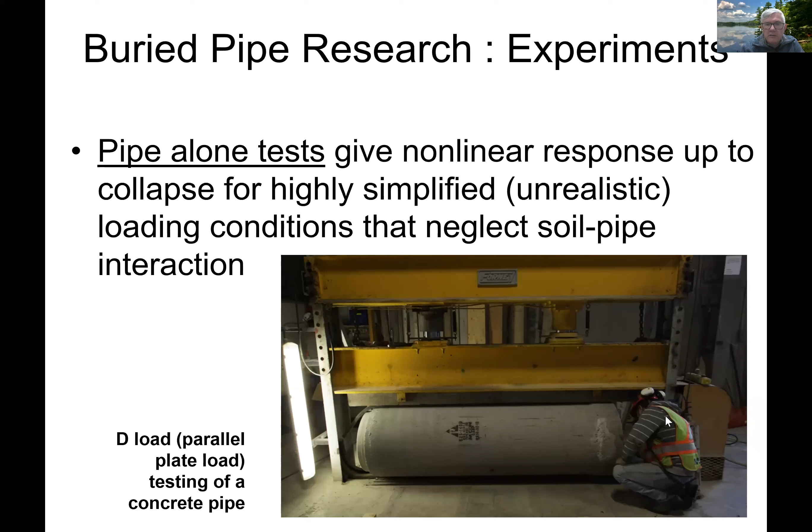Another alternative is to do field testing, which can be very useful because we have access to the complete system being studied - we're able to do loading under vehicles and so on. There are certain things we can get in the field that we can't get other ways, but it can only be for very specific, quite complex site conditions. Often we don't actually know the site conditions because we haven't controlled the soil placement, and the soil part of the system is very important. Most importantly, we normally can't load buried structures up to their strength limits in the field because we're normally testing structures that are in service, and nobody likes us breaking their stuff.

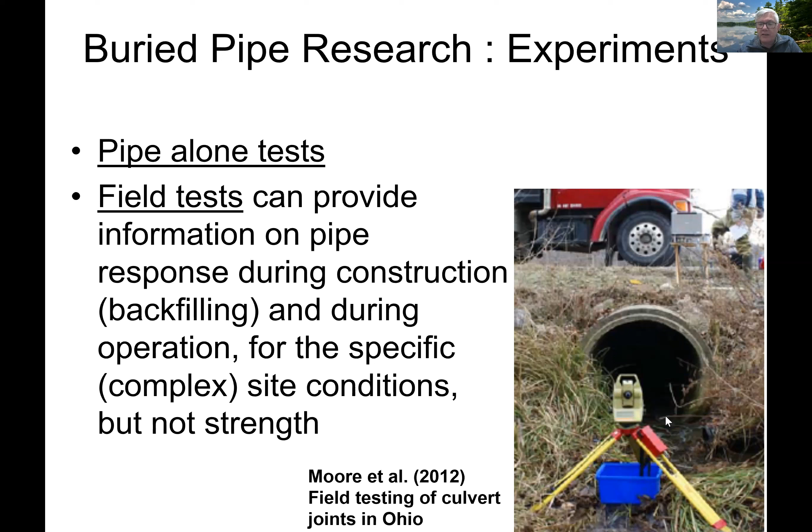Another approach is to do small-scale experiments. For example, I've had some projects using the centrifuge at C-CORE in St. John's, Newfoundland, and centrifuge tests can be performed much faster, and they're very good at modelling nonlinear soil behaviour, but you can't really capture the nonlinear behaviour of the pipe.

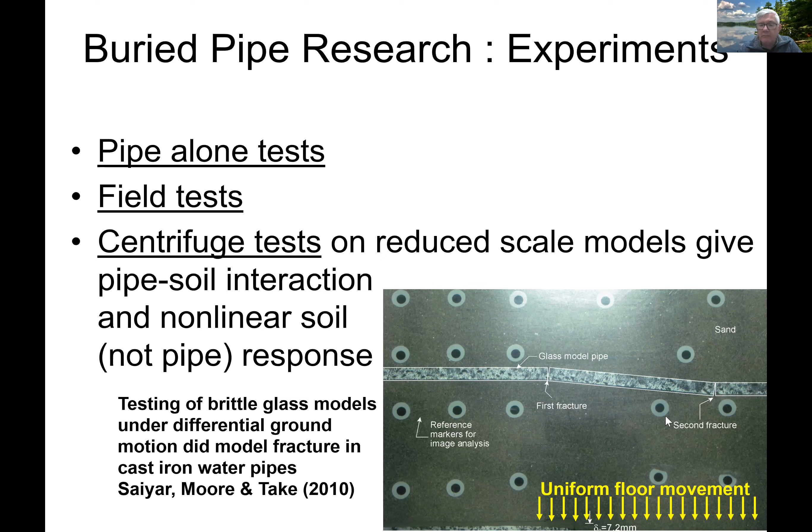And so that's a tool that I do use, but I don't use it that often because a lot of the problems that we're dealing with is the pipe strength, joint leakage, and things like that, which you can't model in a centrifuge. And so the alternative then is to do prototype scale tests, or what I'm calling large scale tests in this presentation, so that we've got both the pipe and the soil.

And because we're doing it in the laboratory, we're controlling the backfill placement. We're getting good understanding of the actual system that we're testing because we're placing the soil ourselves, using normal construction methods, but controlling that and monitoring the way we choose. And because it's in the laboratory, we've got access to equipment like actuators and so on, and we can test up to strength limits.

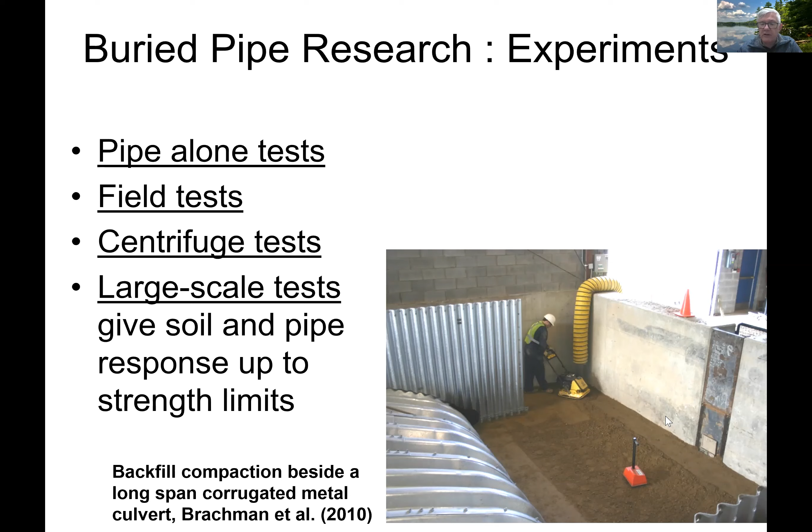So, as I mentioned, the idea of this presentation is to introduce the large-scale facilities at Queen's.

I'm going to illustrate the research by touching briefly on a project on pipe joints, a project looking at erosion into leaking pipes, like corroded corrugated steel pipes that are leaking, so ingress of groundwater produces soil erosion. And we'll also look at the effects of differential ground settlement on joint leakage.

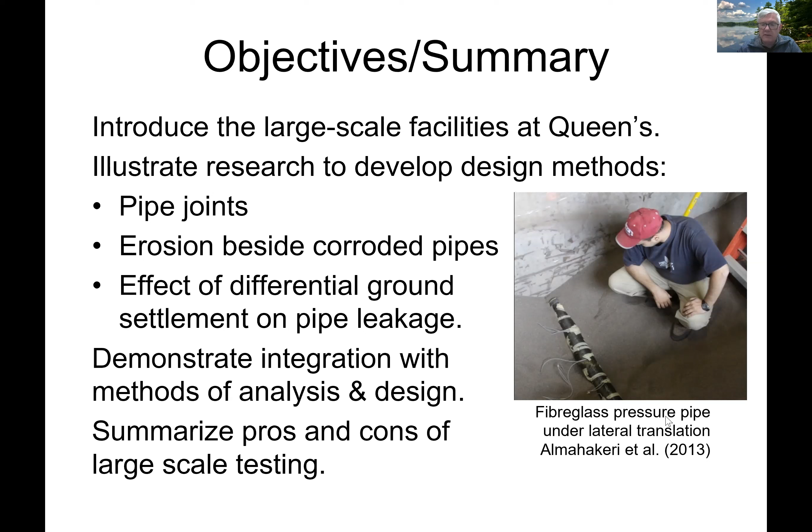I think I'm going to show you how we can integrate that type of experiment with development of methods of analysis and design methods. And I'm going to finish up the talk by summarizing some of the pros and cons of large-scale testing.

So this shot here shows an overview of the test facility at Queen's, the geoengineering lab, which is primarily a buried pipe testing laboratory. This is showing the western part of the laboratory, which is primarily composed of a pit, 16 meters long, 8 meters wide, 3 meters deep.

At one end, we've got a door, which means we can bring in vehicles and load the infrastructure that's buried there under, say, a tandem axle dump truck or something like that. I think I've got a photograph showing that in a moment.

The other half of the pit is specially set up to do trenchless construction. And the particular setup here was a static pipe bursting experiment that was done by one of my former students, Jennifer Cholewa.

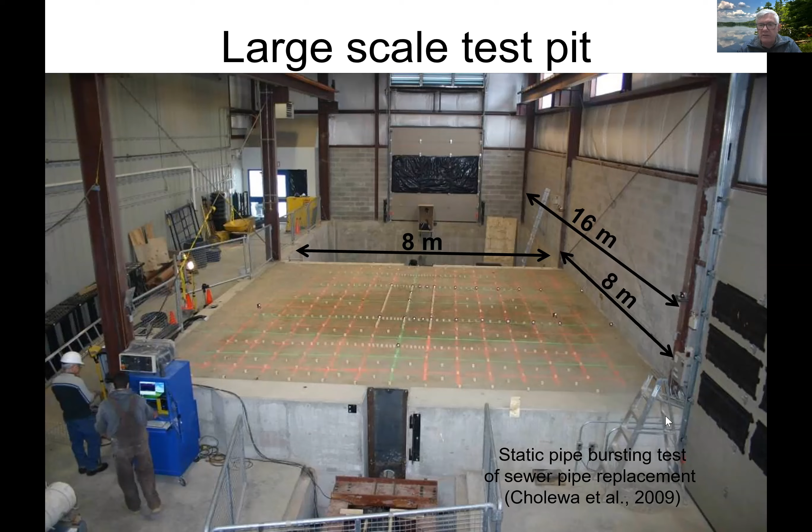So the facility allows us to test culverts up to spans of about 10 meters. We couldn't do much more than that. And here's a former student, Andrea, and the corrugated steel culvert that she tested.

But we also have the pit, as you saw in a previous photograph, divided into two with a removable retaining wall because it's quite expensive to do very big experiments. So normally we're doing tests in the 8 meter by 8 meter plan configuration.

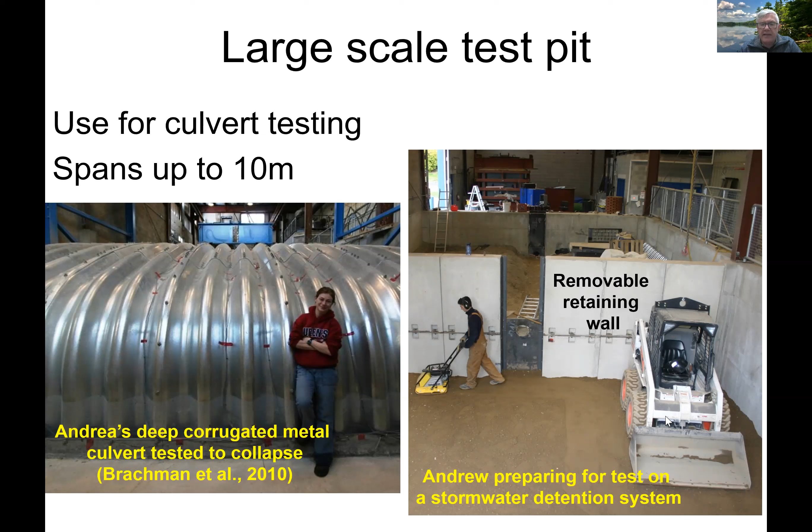This particular slide shows how we can test under the dump truck, as I mentioned, and a typical unfactored tandem axle load, full service load, would be about 24 tons.

But we also have a reaction frame over the test pit, this blue frame, and we can hang our 200-ton actuator into that and apply forces of up to 200 tons onto a set of beams which represent the axles of the truck. So we can test, say, a wheel pair, like one of the steel plates at the end of those beams, a single axle or a tandem axle. And when you make those two different tests and compare them, the difference is about 2 or 3% in the measured behavior, so the axle beams do a pretty good job of representing the truck.

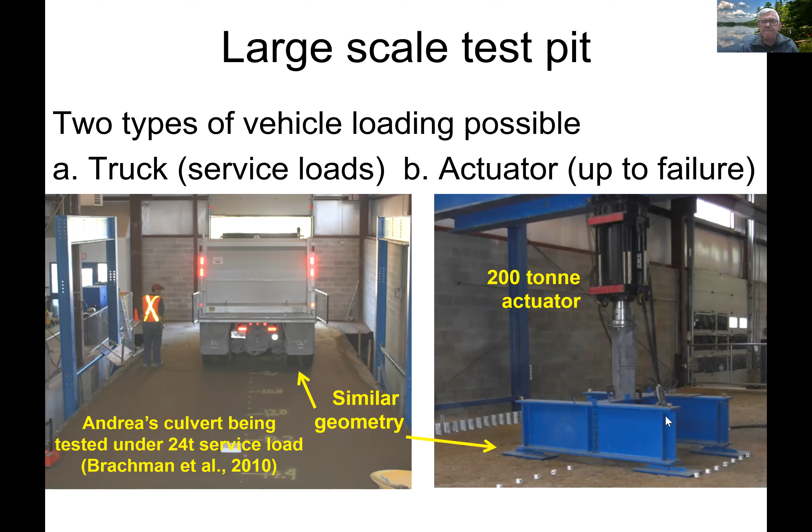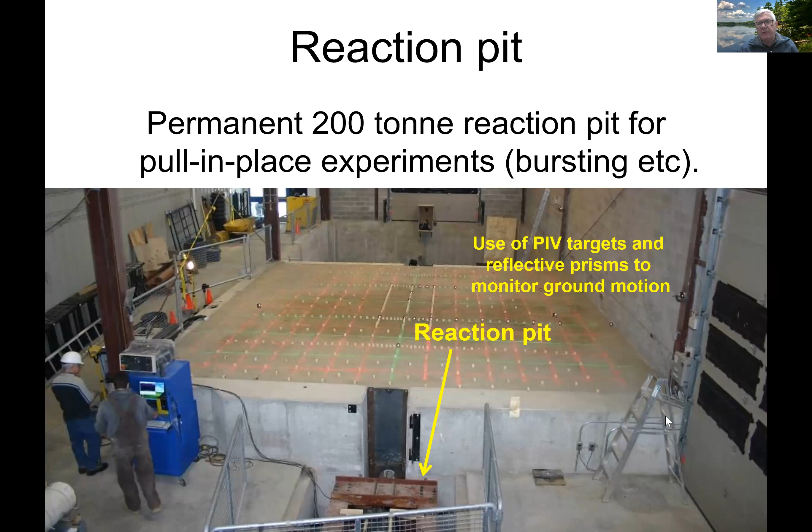The configuration for trenchless construction that I'm showing here is made possible because we have a reaction pit on the eastern end of the large pit. That reaction pit is designed to have a 200-ton reaction capacity, either pushing or pulling, if we want to do those sorts of trenchless experiments.

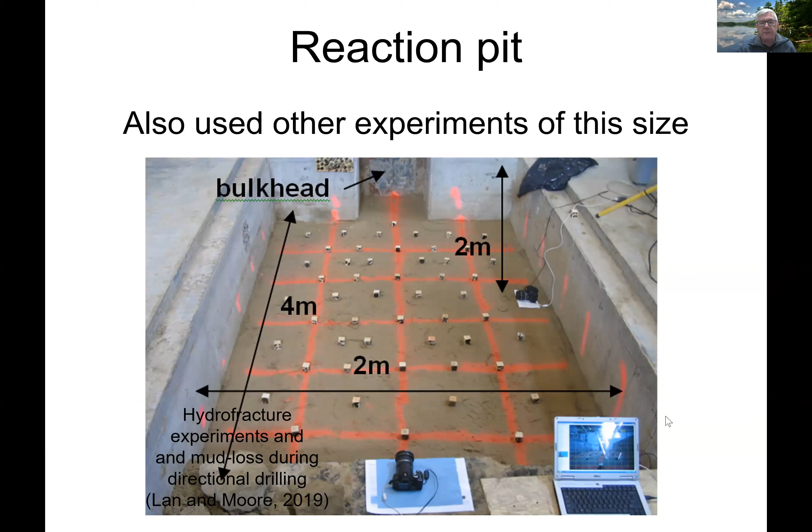We also use that reaction pit for experiments. We've done hundreds of experiments in the lab since it was commissioned in 2006, but probably scores of experiments actually in this small reaction pit - it's 4 meters by 2 meters by 2 meters. For example, a really nice project looking at hydrofracture during directional drilling, loss of mud from a borehole up to the ground surface through the sand.

We also have 2 other facilities. One of them is the split box, which is essentially a normal fault simulator. The box is just under 8 meters long. Half of the box's floor is supported by 4 screw jacks, and the other half is compacted fill sitting on the floor of the pit. We bury pipes in a zone that's 1.8 meters by 1.8 meters in depth and width, and then subject that to a normal fault by lowering those screw jacks.

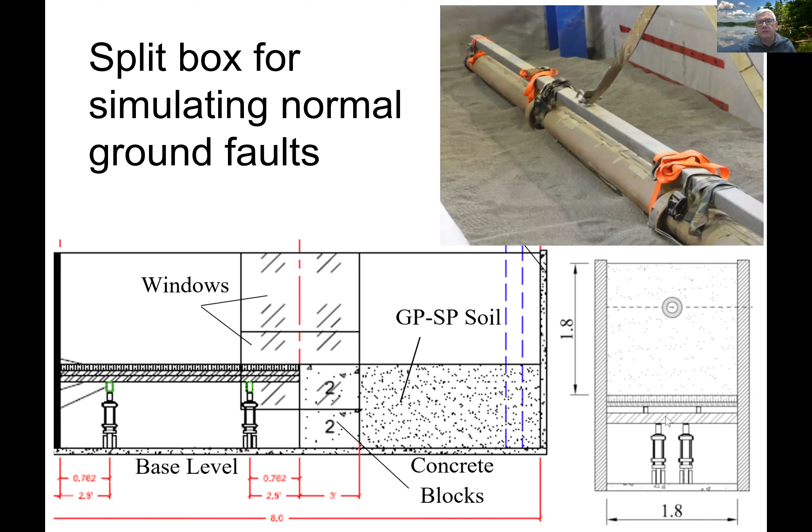I'll be illustrating my talk briefly with discussions about one of those specific tests.

Finally, I wanted to introduce you to the deep burial simulator, the newest of the facilities. It's a pit 4.6 meters deep, 3 meters wide, and 5 meters long, built for 2 purposes. One is to simulate burial up to about 18 meters of cover, using 2 250-ton actuators bearing onto a stiff steel grillage to apply an equivalent overburden pressure. This pit is also sealed, like a bathtub, so we can do saturated ground testing. I'll be talking in a couple of minutes about some erosion experiments we've performed.

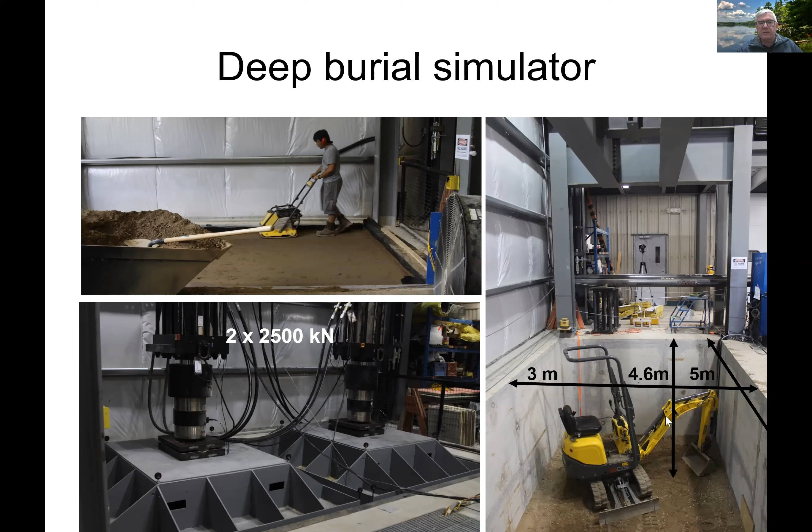So the first of them, I wanted to talk a little bit about the surface loading facility at the west end of the laboratory.

This is a project performed by a former doctoral student, David Becerril Garcia, who was looking at the behavior of joints in culverts. It's a project for the US highway departments about a decade ago, and it involved testing concrete, corrugated steel, and polyethylene pipes with different sorts of joints under surface loads, understanding the impact of truck loads on the demands on the joint, the rotations and the shears.

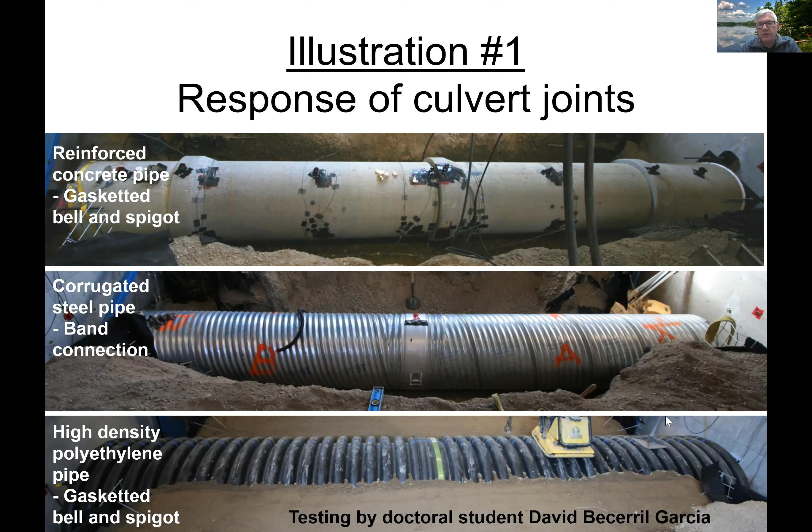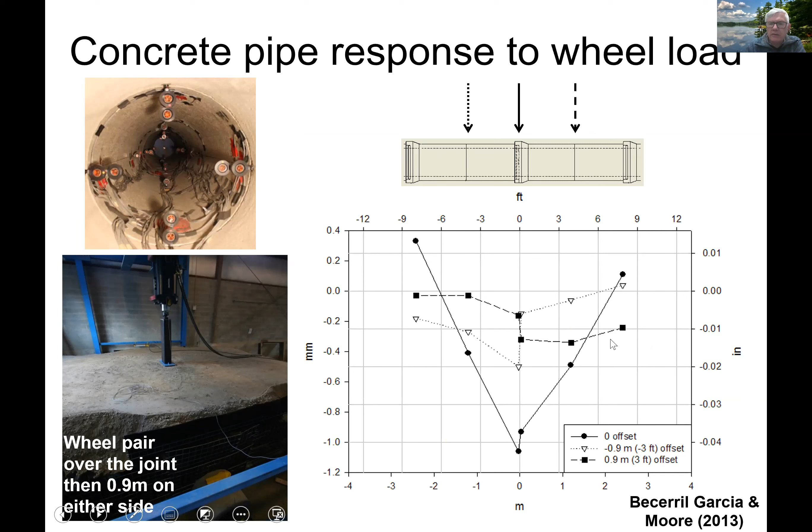And then, of course, if we put the load to the right, we get a shear response that's a mirror image of that. This allowed us to establish the kinematics, obtain experimental data, and develop design models proposed for incorporation into... I don't know why it's not moving forward. There we go.

But also, consider that earth loads produce no joint response if the soil support is uniform. But if, for example, we've got softer soil under one pipe and stiffer soil under the other, that difference in soil stiffness will also produce shear and rotation. So we developed a set of design equations for consideration by AASHTO for inclusion in the LRFD bridge design specifications.

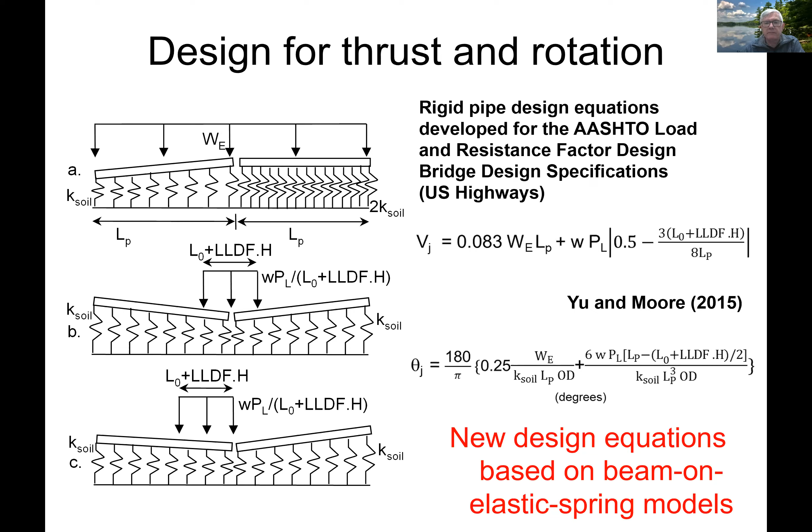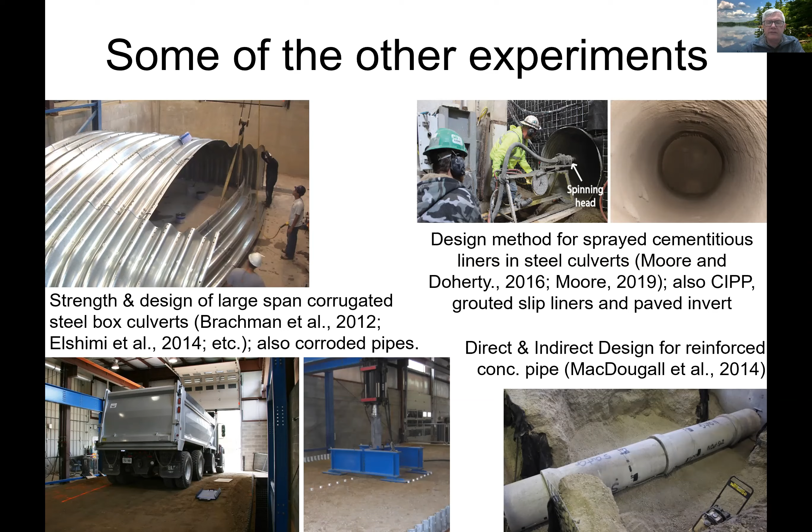The second project I wanted to touch on is this project in the deep burial pit, where we've looked at soil water ingress through corrosion perforations.

The guy fortunately was not killed. Passers-by were able to rescue him from the hole. I think he was not entirely pleased about his experience, but he wasn't injured.

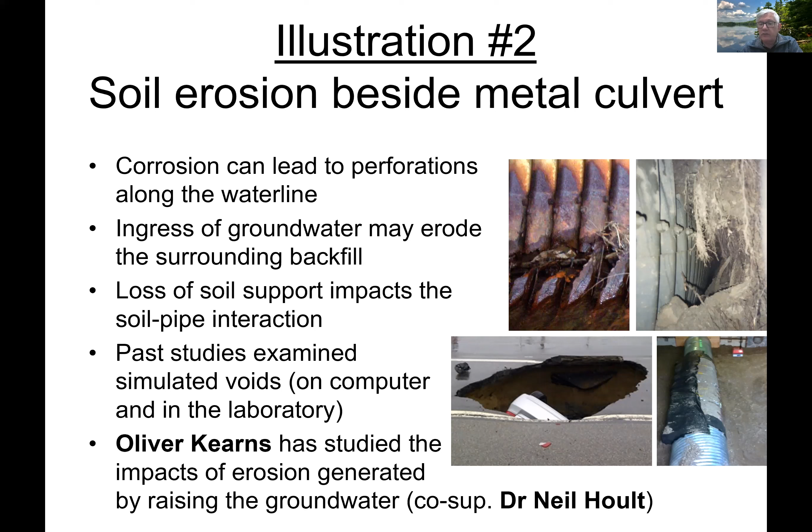We've also done experiments in the past where we simulated a void using an airbag. But I wanted to show you some much more recent work using the deep burial simulator, a project by Oliver Kearns with my colleague Neil Hoult, where we're looking at actual erosion into a leaking corrugated steel pipe.

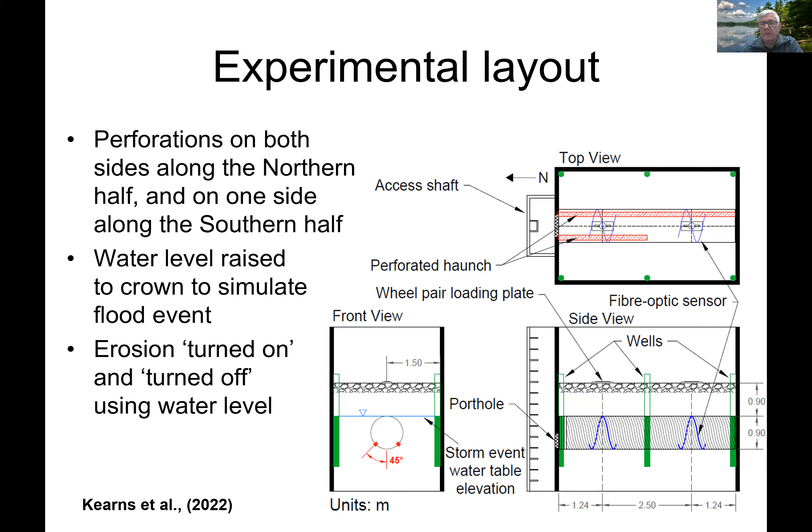Then we raised the water level, produced erosion, and then dropped the water level down again to arrest that erosion, to turn it off. We did that twice to look at two different levels of erosion. I'll show you one set of results in a moment.

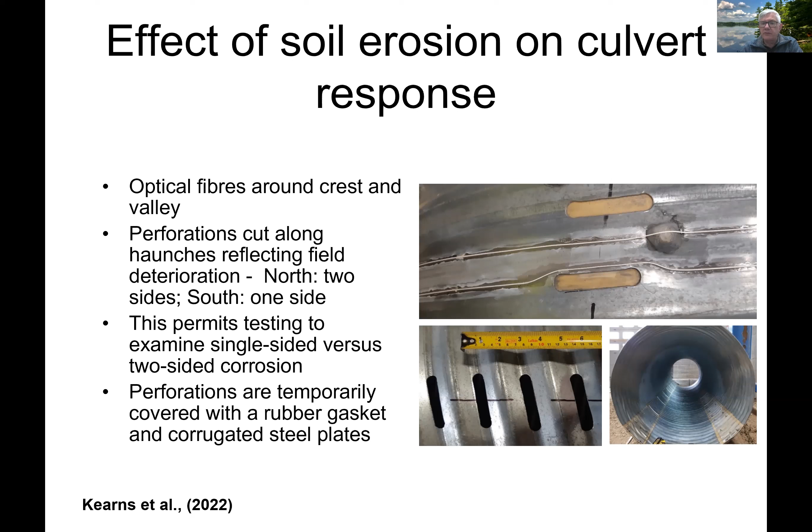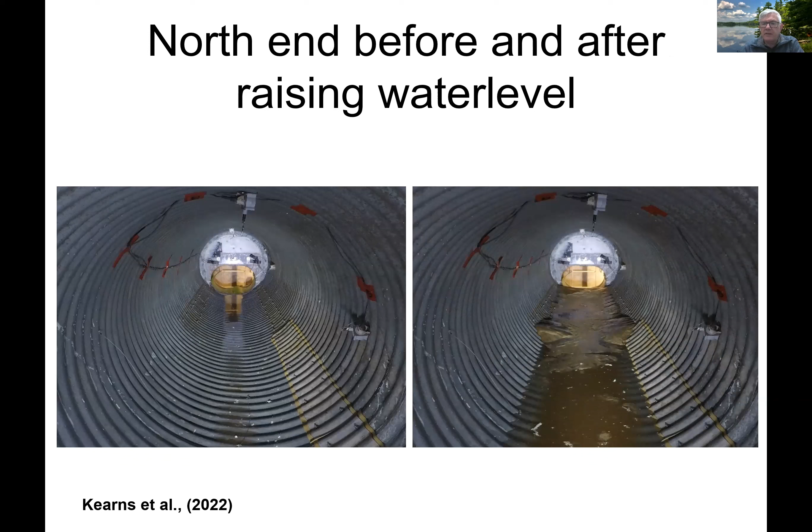The depth from the pipe of the voids varied, but the contact between the void and the pipe was pretty consistent. So it was a sort of little angle of soil, or angle of the pipe circumference I should say, where the soil-pipe contact was lost, and it was reasonably prismatic, so reasonably uniform along the pipe.

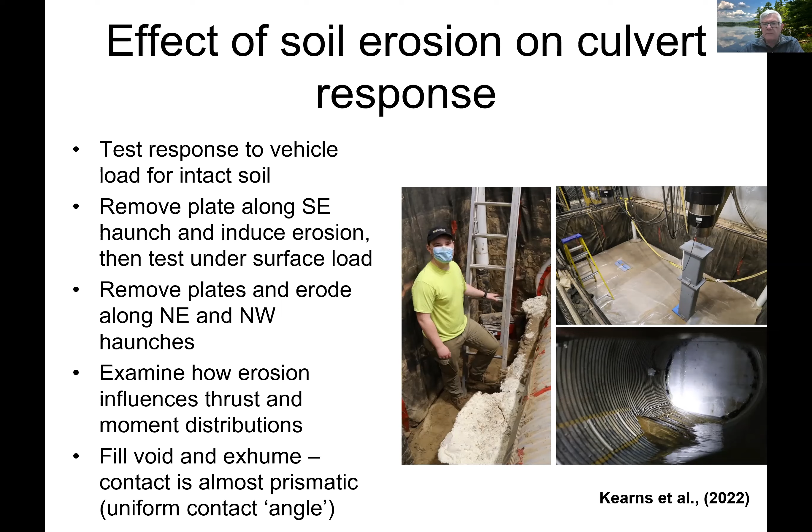That's about half of the fully factored service load that you'd expect or require in Ontario for one of these structures.

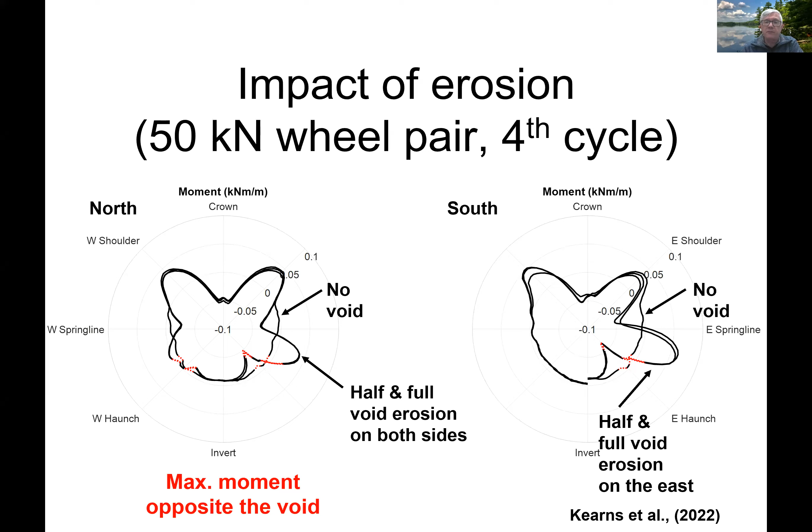So we saw approximately prismatic geometry where the soil was lost at the interface between the soil and the pipe, and we get these large moments at that point. I didn't show you the thrust values, but there were modest changes there, though much more substantial moment changes as a result of loss of soil support.

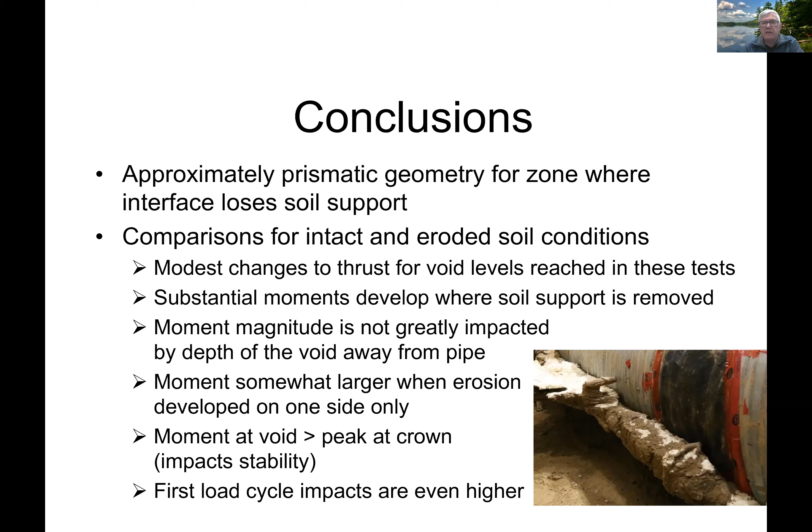The moment magnitude wasn't greatly impacted by the depth of the void away from the pipe. It's mainly controlled by the angular size of the zone where the soil support's been removed. And we saw that the critical moment moves from the crown to that zone of lost soil. In fact, the impacts under the first load cycle were even higher than under the fourth load cycle.

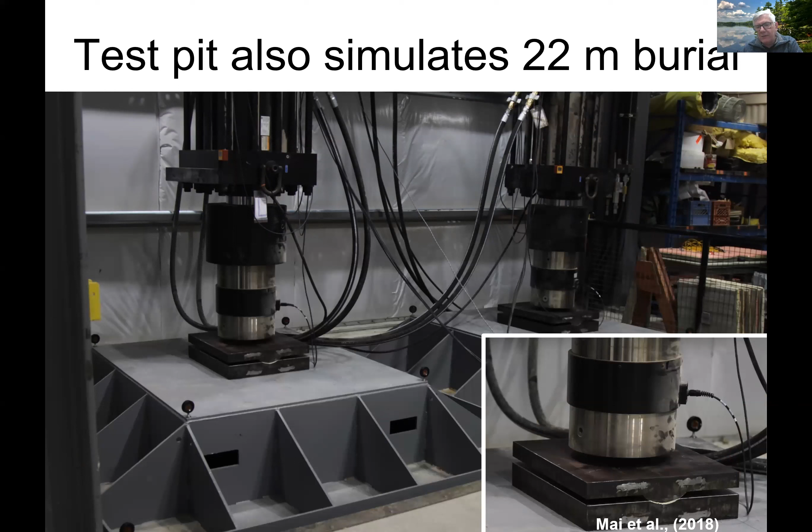I talked a little bit about simulating deep burial with the actuators, with these steel plates. Part of the reason we're able to do that is having moment release joints between the steel grillages and the actuators. So we designed and built these moment release bearings. What that does is when we apply force to those vertical plates, those vertical forces to those horizontal plates, let's say we're testing under a flexible pipe, like this steel rib reinforced polyethylene pipe,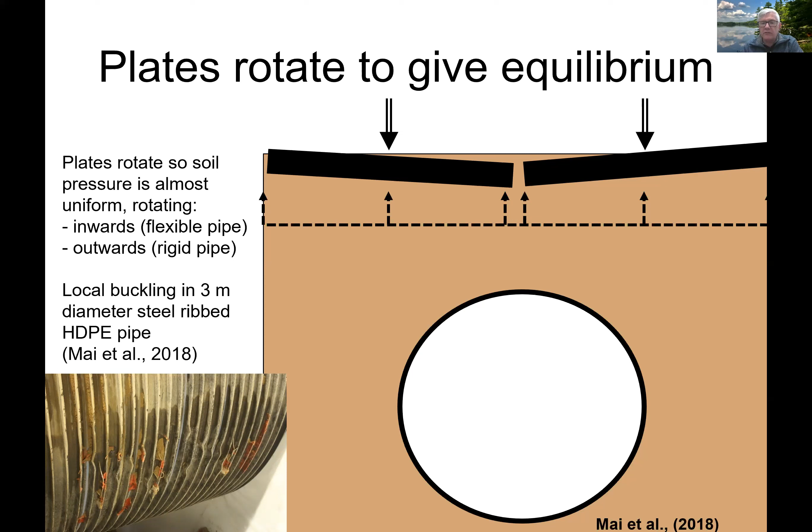that pipe is much less stiff vertically than the soil surrounding it. So if we didn't allow the plates to rotate, we'd actually get lower stresses under the center and higher stresses out at the edges. But because we allow the plates to rotate, the moment is released and we get approximately uniform pressure representing that column of soil over the top.

I'm just going to finish, I think I've got just a few more minutes, talking about another project where we're looking at joint leakage. We've done a number of these tests in the split box, but this is a nice test on a 600 millimeter diameter polyethylene pipe with a gasketed bell and spigot joint, with the joint located near that fault.

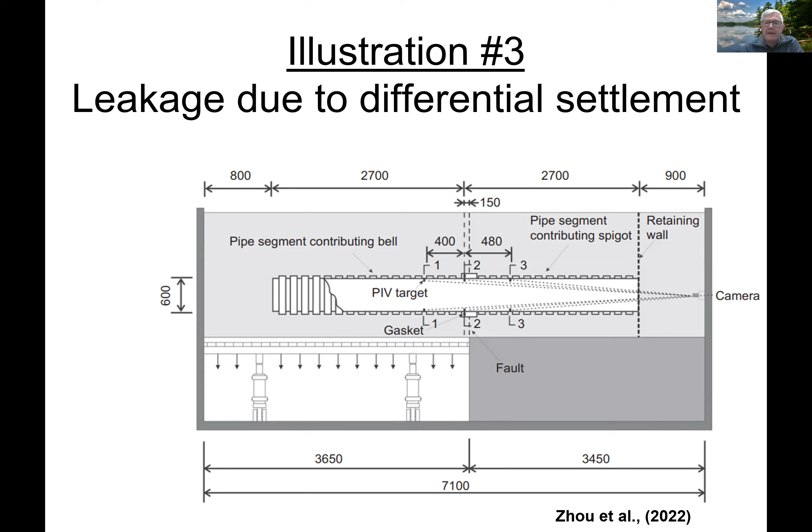And then, of course, we drop the left-hand part of the floor of this pit and subject the pipe to longitudinal bending, which imposes demands on the joint. This is a bit of a complicated picture, so let me walk you through it. Let's look at the bottom part of the picture to start with. On the vertical axis in the bottom half of the diagram is the fault offset, the amount of fault offset, and on the horizontal scale, we've got the time of the experiment.

So we had no movement for the first about 900 seconds. Then we lowered the floor 10 millimeters, kept it constant for another few hundred seconds, lowered it another 10 millimeters, and so on. As we were doing that, we're monitoring the vacuum that had been imposed in the polyethylene pipe.

So normally a gravity flow pipe like this, we're thinking of the water pressure actually being from the outside, so the sewer is actually below the groundwater table. Our goal with the joints is to stop water coming into the pipe as much as it is to stop wastewater getting out. So we use vacuum in the experiment to impose that external pressure, though of course it's air pressure we're getting rather than water pressure.

And then we monitor that vacuum, and that's the top half of this graph showing the vacuum pressure with time. During that first phase, as we're pumping the vacuum out, we're producing 35 kilopascals of vacuum. Then there's a steady decrease in that pressure because of a little bit of loss from our system with time, and that's got nothing to do with the joint.

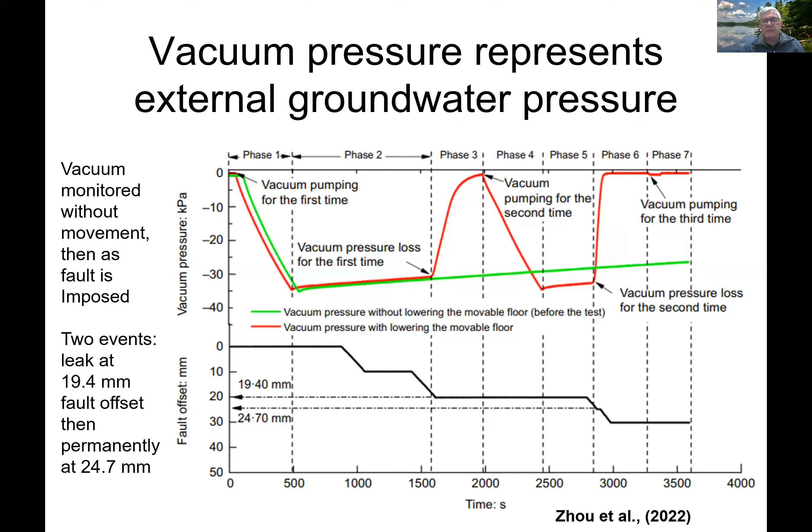So we can monitor the pipe's deformations using linear potentiometers and digital image correlation. We're able to see how much rotation angle developed across the joint at these two different levels of floor movement. At 19.4 millimeters of floor movement, we had 0.44 degrees of rotation, and at 24.7 millimeters, we had 0.58 degrees of rotation.

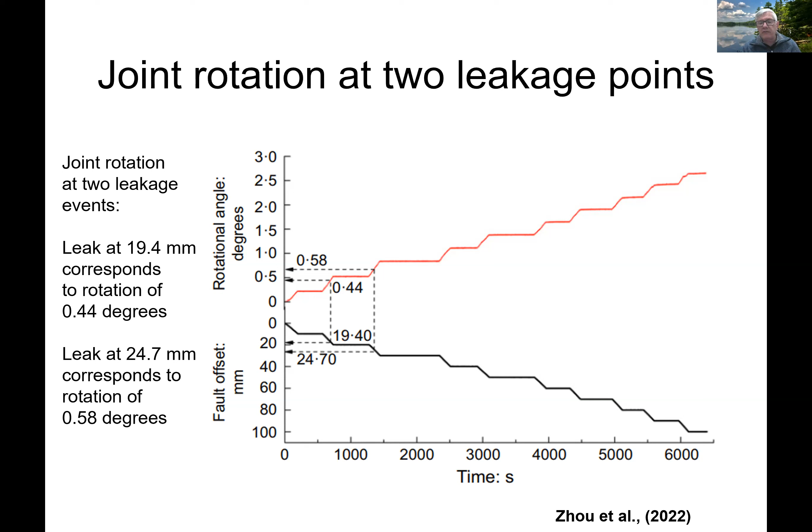That's significant because these joints essentially are designed not to leak up to 2 degrees of rotation. What we're seeing is leakage at much smaller amounts of rotation, simply because we don't just have rotation, we also have shear.

So in this slide, here's how we've interpreted the shear force. This was obtained by measuring strains along the pipes, getting moment distributions, and then taking gradients of moment to get shear force. We're able to infer from the optical fibers what the shear force was when it started to leak, at 8.9 kilonewtons of shear, and the shear force when we could no longer get it to seal at that second leaking event, 11.3 kilonewtons.

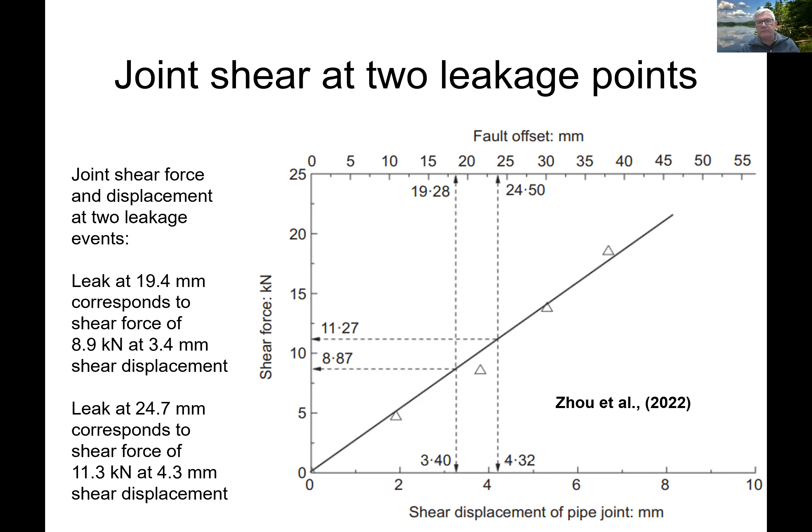Really, the reason why we're studying this is because differential settlements occur along pipelines due to various factors: slope instabilities, various construction conditions, but it's also something we're expecting to result from climate change. Climate change is producing loss of permafrost in the north, but it's also changing water levels in the groundwater table position, which will produce settlement, and those settlements will not be uniform.

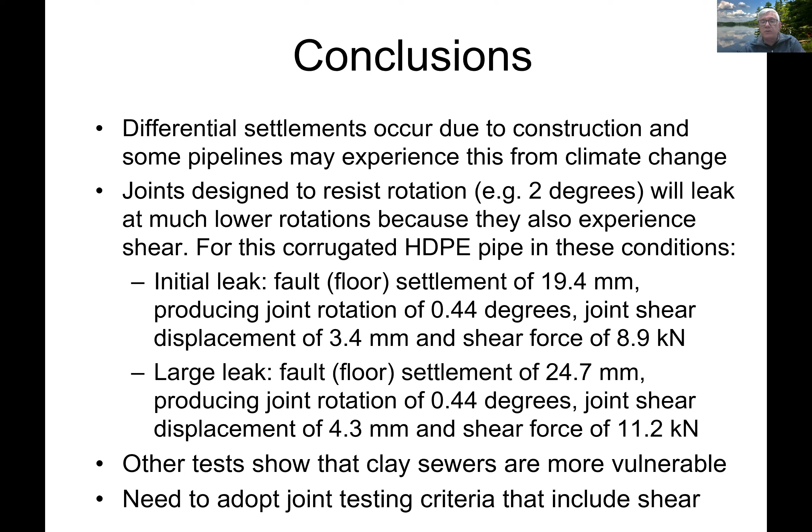We've seen here that joints designed to resist 2 degrees of rotation without shear, in the index tests that ASTM has defined for these structures, will actually produce leakage at much smaller values of rotation because of the presence of shear force when it's a buried pipe. We've seen in other tests on clay sewers, for example, that they're even more sensitive to differential ground movements producing leakage.

So I'll sum up and talk a little about the pros and cons of doing large-scale tests. One benefit is that by doing a test in the laboratory on a full-scale system using regular construction equipment, we're doing something reasonably realistic, but under very controlled soil density conditions. We're avoiding the impacts of weather, and also the realities that contractors face with moisture contents in the backfill changing, ground conditions changing, and perhaps a level of site supervision changing during the project, producing unknown outcomes.

We can do service loading in the lab, but we can also do ultimate strength testing because we have high strength actuators and other loading systems permitting us to bring these structures up to their strength limits. We can test both the soil up to its limits as well as the pipe structure itself. It's efficient to design and execute the test because it's indoors, much easier than doing a big project outdoors.

And we have an environment where we can use novel and conventional instruments like linear potentiometers and optical fibers relatively easily, where sometimes these instruments are harder to use in the field. It allows us to develop design methods or evaluate key design assumptions and approximations that we rely on.

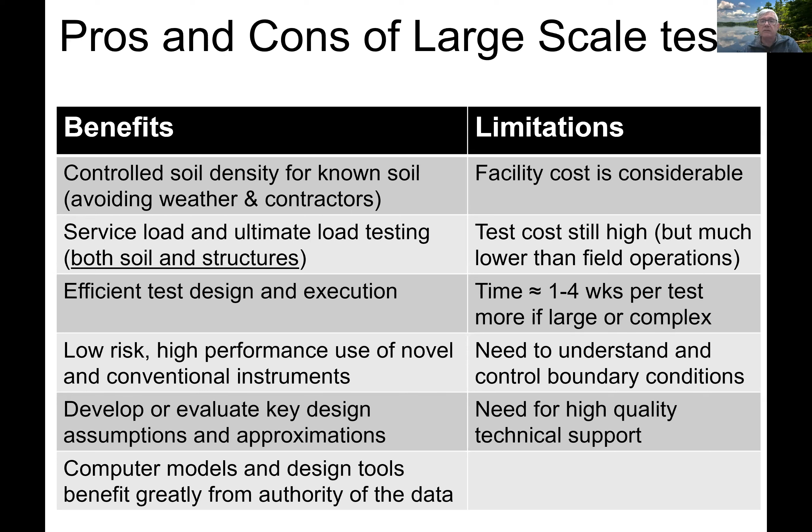And of course, to do these large experiments with a high level of confidence, we need high quality technical support. That can be expensive.